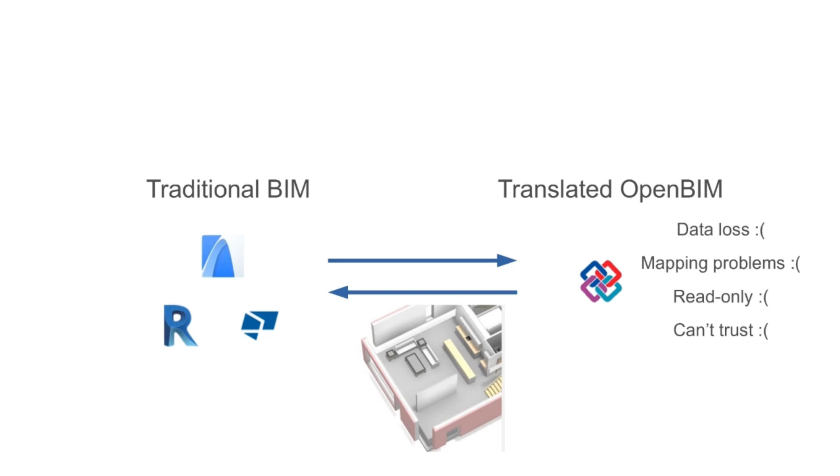So today, I want to go further and talk about native IFC. So instead of translating into IFC from traditional BIM, we can now directly author IFCs natively without any imports, exports, no data loss, and no model linking. So translated IFCs have artificial limitations imposed by proprietary systems. So I'd like to show you some examples of what you can do with native IFC.

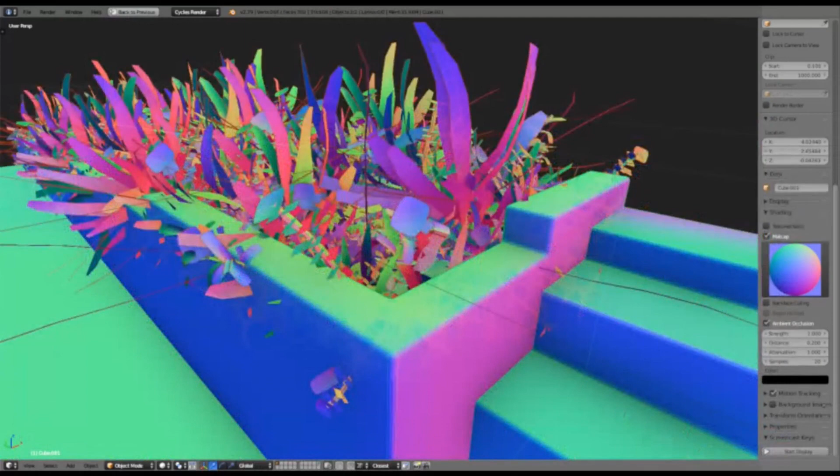Here's an image of my living room back in 2019, and this image is quite special because it's not a photograph. It's actually a render of an IFC model, and every object you see is classified into IFC object types. It has enough metadata to be scheduled with detail down to every individual blade of grass. And this is considered over-modeling with traditional BIM tools, but it's actually quite average if you use CG software instead to create your BIM models.

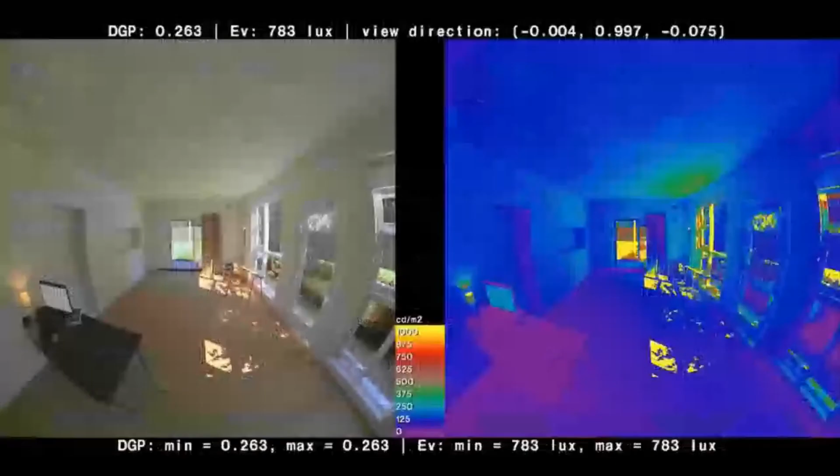This render is also special because it's not an artistic render. It's a photometrically correct, validated light simulation using material data stored in the IFC itself. So there's no test renders, no lighting adjustments, no color pickers used. It's just pure, rich IFC data with numerical physical measurements from product samples. This is rendered using the free software Radiance, which is the gold standard for lighting simulation. So the image shown on one side is the simulation adjusted for the CIE average human eye, and the other is the photograph. So with native IFC, your BIM model can store the data required for validated render outputs, just like this.

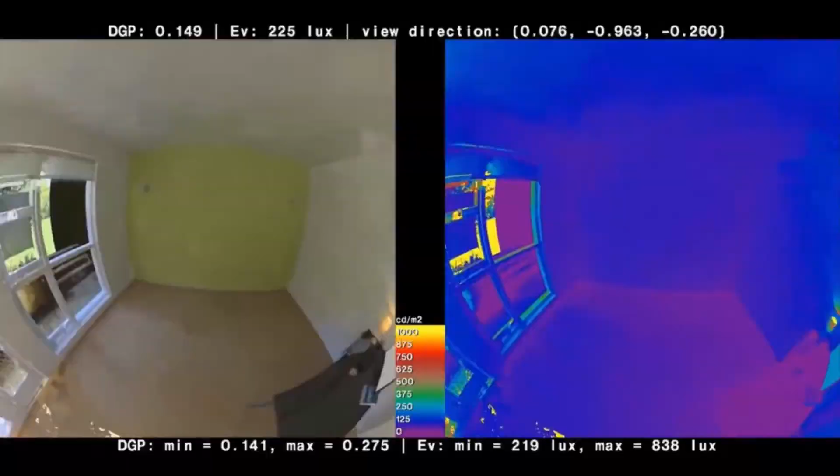Here's some derived work by somebody online who then took this simulation and extended it. He does thousands of simulations to cover every frame taken from a head-tracked VR environment and calculates the daylight glare probability and vertical illuminance for lighting engineers. So here's a luminance simulation with the false color values on the right.

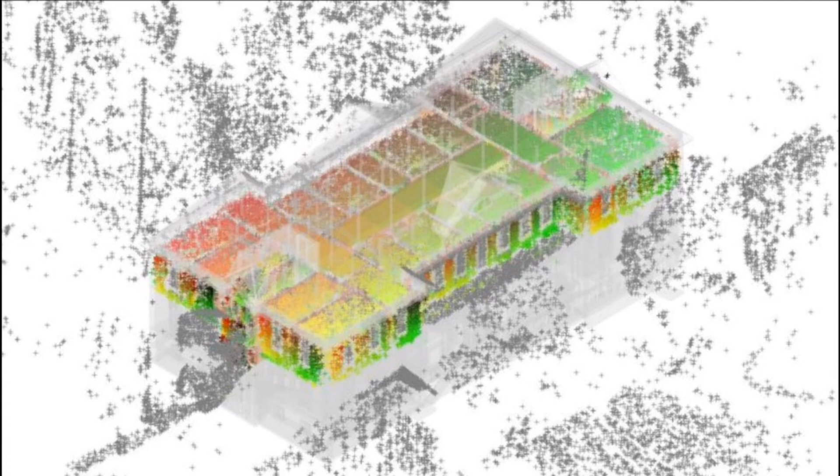IFC also supports point clouds. Here we're taking measurements off a construction site. So semantically, it's not just a bunch of points. These points are actually assigned to BIM objects. So if you're looking at as-built verification, heritage, or model archival, the IFC data and the point cloud scans can integrate.

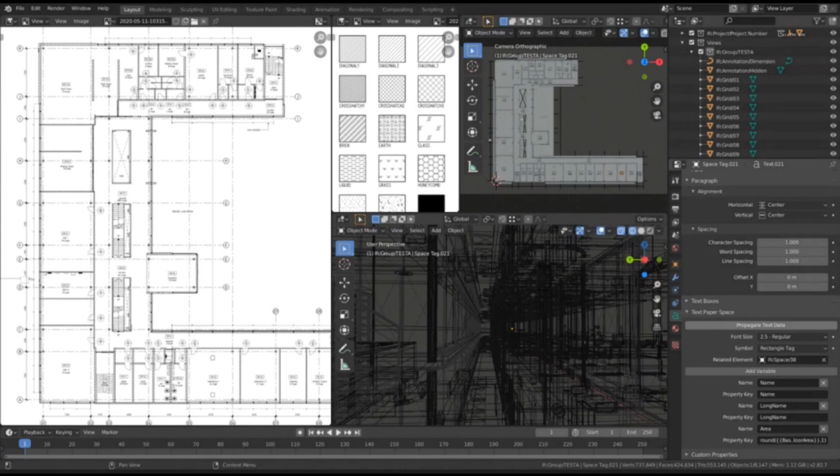You can also generate drawings from IFC. Here's a Revit sample model taken out into IFC, then fully annotated and documented using native IFC. So there's no Revit or AutoCAD, but just pure native IFC for all the grids, dimensions, labels, and so on. Other software in our industry create 2D drawings using proprietary formats such as DWG. Other derived formats like DXF, DWG, and PDF also miss out on all of the BIM data. In contrast, what you're looking at here is the open SVG format, which means that anybody can open it on a standard web browser on your tablet or your phone with no special software restrictions like DWG has.

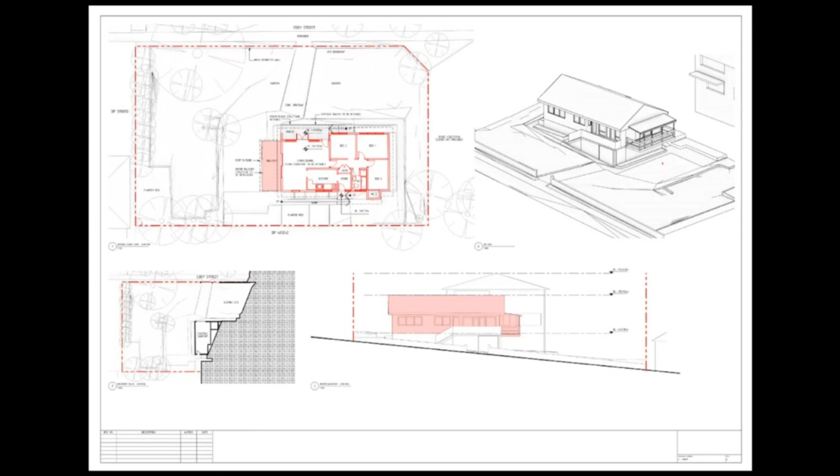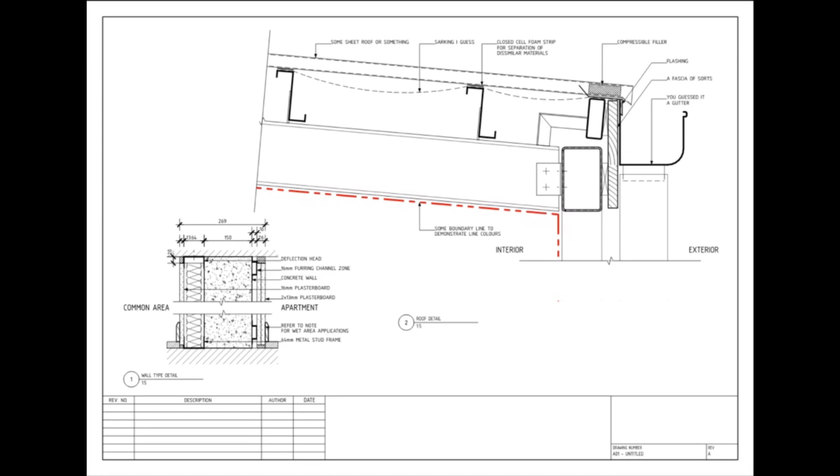SVG also supports semantic metadata, so we can store IFC data in the SVG. So if I have a 2D rectangle on the plan, it knows it comes from a 3D object with material properties and tags. So just by generating a single plan, a viewer can interactively display different properties with different hatches, symbols, or labels on the fly. There's no need to spend hours shuffling around tags on a sheet because your viewer can dynamically generate them. And being native IFC, this means that our drawings now become programmatically queryable. In the same way that you can write scripts to query a model, you can now write scripts to query 2D drawings even after they've been published.

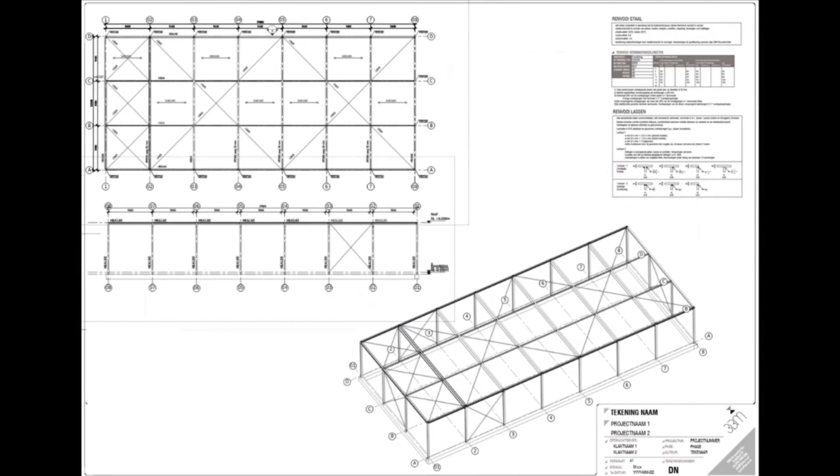So imagine on site, on a tablet, we can click through markers and labels on fully interactive drawings, which can go back and forth between 3D and 2D and auto-generated schedules and specifications, attached BIM documents, and using completely free viewers that work in a regular browser on any device. This could be the future of drawings and diagrams if we switched away from proprietary DWGs and moved towards open data standards.

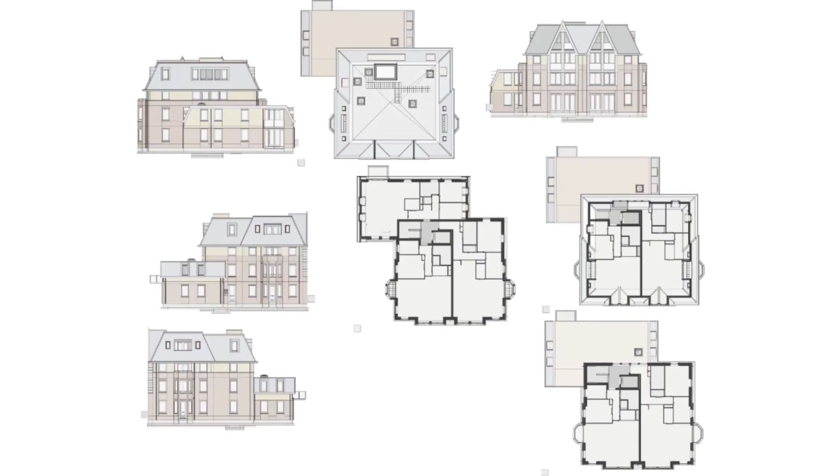Native IFC also supports structural analysis. It supports all the information you need to create analytical models with boundary conditions, load cases and combinations, and structural members. It can be linked to any structural engine you wish. And once the simulation is performed, the results and the reaction forces can then be stored back in the IFC.

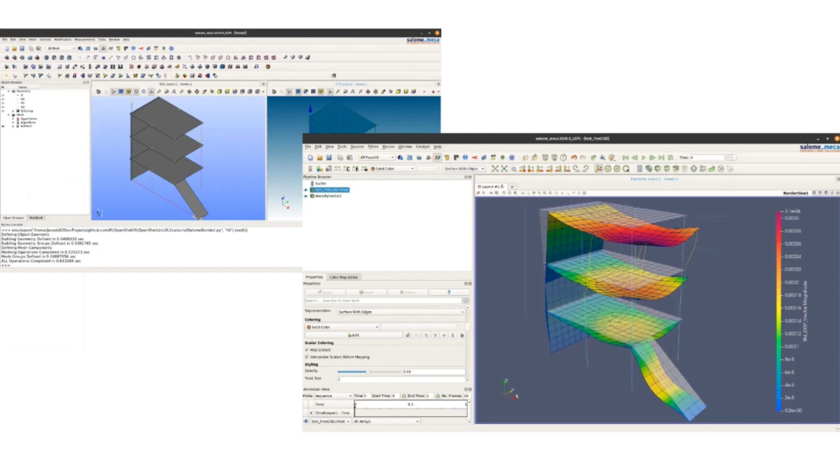So in these images, the structural analysis was performed using an open source software known as Code_Aster, but there are other tools that can be used too. The AdaPy software lets you use high-level code to describe structural IFC components, and these components can be visualized and analyzed both in Code_Aster and CalculiX, another open-source structural analysis package.

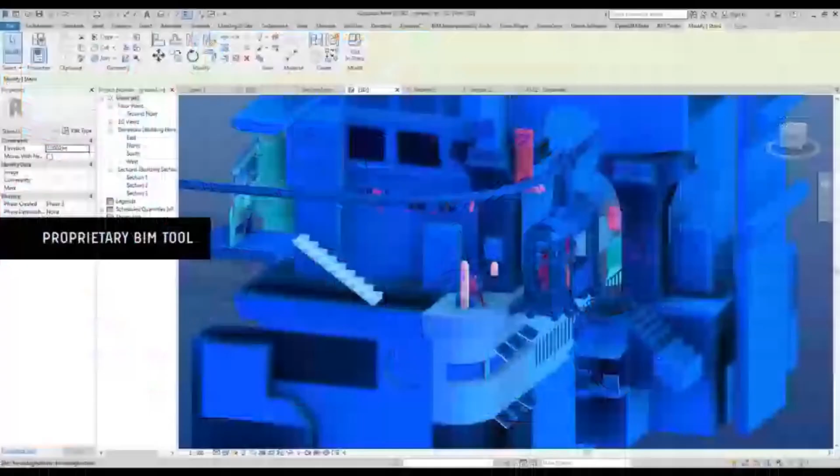Here's an example custom workflow where the user sketches and traces walls which are then converted into IFC walls. So here's another example where a scene is sketched in 3D and you can view it in a VR environment. And even though these are just rough sketches, it's still IFC, so it can be annotated and scheduled. But it still gives you the freedom to think in non-manifold geometry. So here you can see the same scene brought into Revit through IFC.

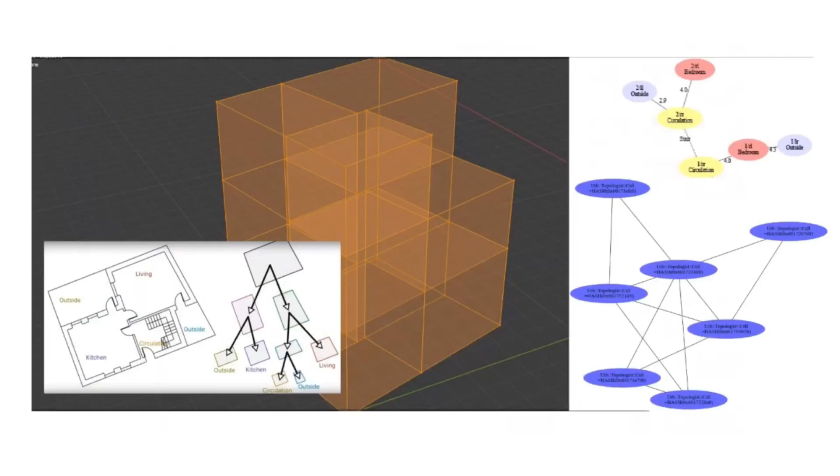And in this example, the building is generated. So the user can draw boxes of these non-manifold spaces, and with some topological analysis to determine the space connectivity, it can generate whole buildings and cities. And so the resultant spaces know their spatial function, and all the walls, doors, and windows are natively stored in the IFC. This same approach goes through an evolutionary solver to start scoring the spaces with respect to the values in the architect book A Pattern Language.

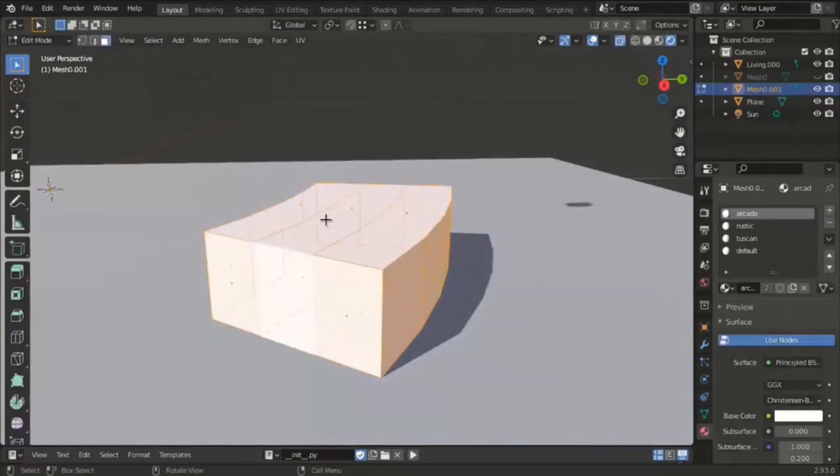And the software we're showing here is actually a combination of 3 free software: Topologic, Homemaker, and the BlenderBIM add-on. So Topologic provides the topological analysis of the geometry, where you can determine whether spaces are connected using code. Homemaker then uses Topologic to generate designs in native IFC, and the BlenderBIM add-on then helps visualize and use Homemaker to modify these IFCs.

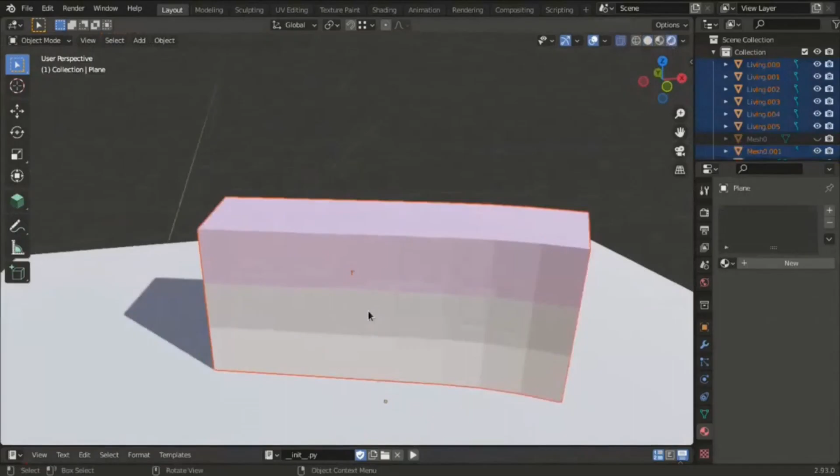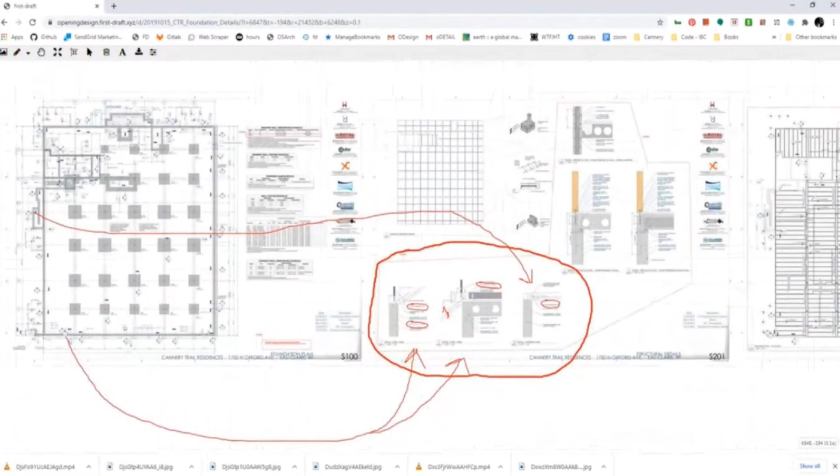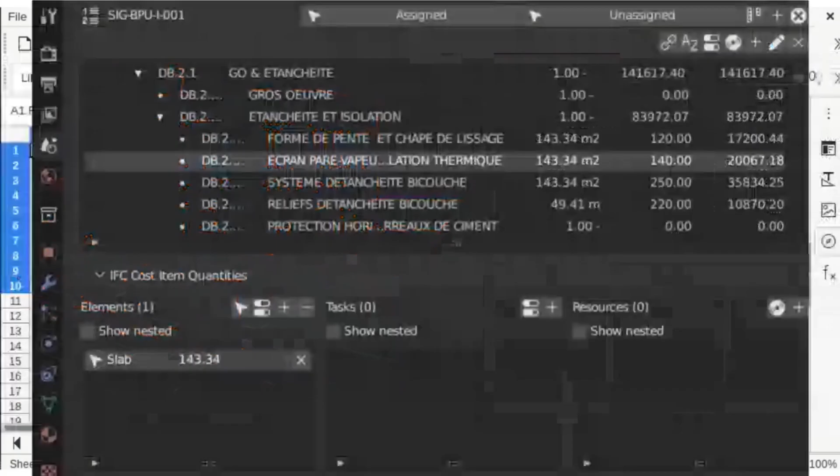Native IFC also supports costing completely integrated into the model with formulas and derived quantities. So you don't need to export models or link models or map the models. You can just directly create your cost schedules within the model alongside your design team. And even more complex operations like automatic formwork calculations can be performed and recorded directly in your cost schedules.

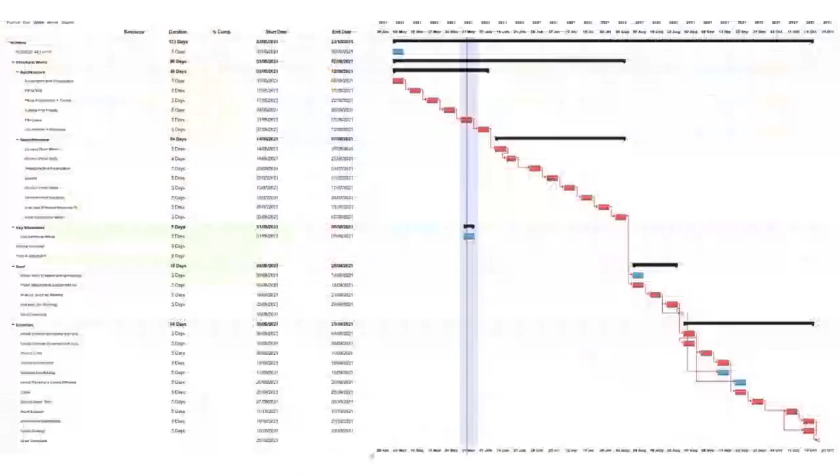And the scheduling can also be done with native IFC in a similarly fully integrated manner with no exports or linking. You can create calendars, work schedules, task dependencies, and calculate critical paths, float, early and late dates, recorded versus actual. And naturally, we can also visualize the progress or generate animations. And all these animations were generated directly from the IFC. So if you update the model or the schedule, the animations automatically update alongside it.

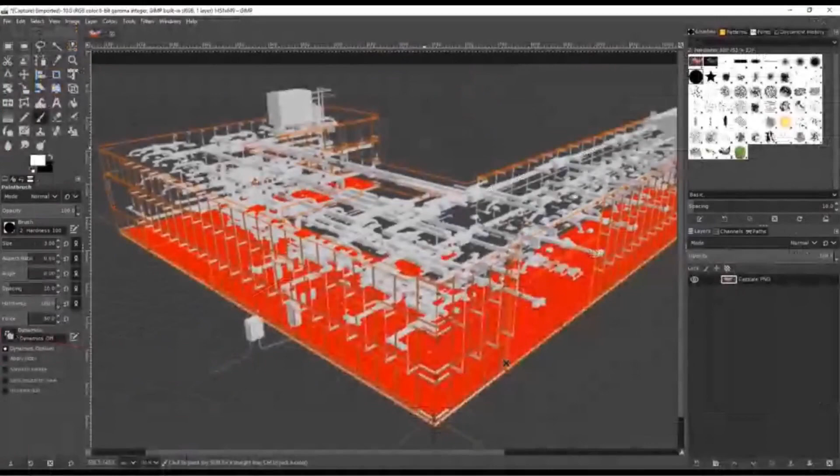There's also automated model checking, project asset libraries, classification system integration, design constraints. But I don't have any pretty pictures for those, so we'll skip over this stuff. So how does native IFC actually achieve all of this?

IFC describes a series of concepts that have meaning in our industry. And each one of these concepts is known as a class, and that's how the Industry Foundation Classes gets its name. So for those who know programming, this is very much like classes in programming. And for those who don't, don't worry about it. Just think of a class as a concept. And each class has a definition provided as part of an international standard. And these classes have attributes to give information about them, like name or description.

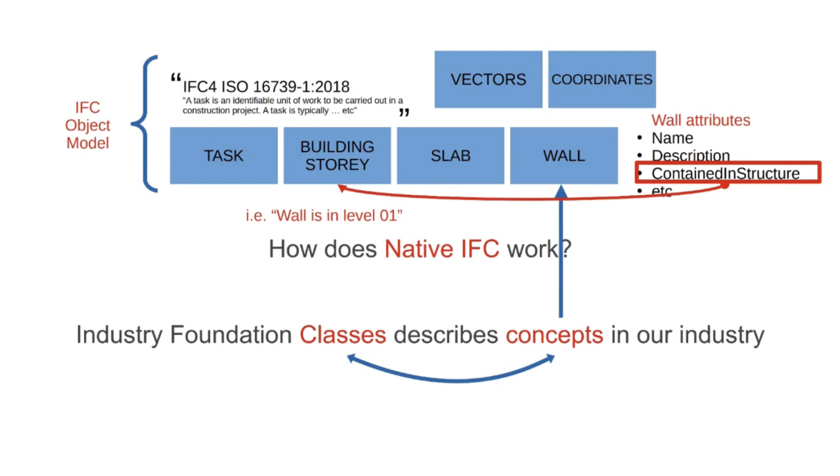And some of these attributes refer to other classes, so classes can be connected using relationships. And some of these classes are semantically meaningful to humans, and some are a bit more like raw data that makes sense only when combined with a semantic class. And when you put all this together, this is known as the IFC object model, and you can query and generate output from it. So any software can create and describe BIM concepts using IFC classes with any programming language. And if you want to transfer or store some of these classes, you can serialize it into one of these formats.

And the one most of us are familiar with is the .ifc file, and this is a plain text STEP-based serialization, but you can also use XML, JSON, and binary. Or you might not even use a file. You might use a relational database or a graph database, or just something purely in memory and access it through an API and exchange snippets of JSON or XML.

In total, there are nearly 1,000 IFC classes, and we won't have time to go through them today, but I can provide a high-level overview and pick out some classes as an example of what's possible. And because there's so many classes, the definition of these classes are categorized into a hierarchical tree, and this groups together similar classes. And when you group them together, this means that they inherit all the attributes and the relationships of their parent classes. So you can think of this tree as a dictionary of IFC classes, and you can see this full list on the buildingSMART online documentation.

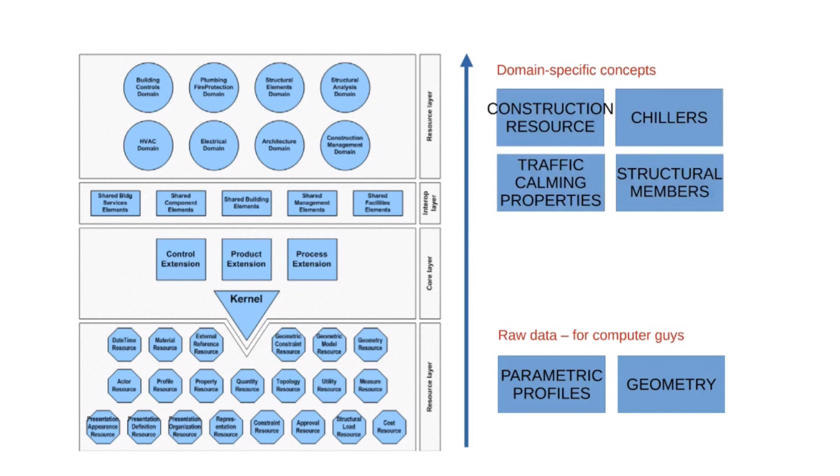And these groups then have more subcategories within them. And these categories are designed for different audiences to understand. At the bottom, we have the fundamental building blocks, like the classes that represent geometry. And at the top, we have high-level categories, which are most relevant to specific disciplines, like HVAC classes, or electrical classes, or structural classes. And in between, we have classes that are shared across multiple disciplines.

And for some people, they prefer to browse the dictionary of classes via an alphabetical list. Some like to look at it as a hierarchical list, and some like to look at it using these categories. And there's no right or wrong. They're all just different ways to navigate through IFC concepts and will appeal to different people. And although this dictionary is a great reference of all the classes and concepts in our industry, a dictionary only tells you the meaning of words, not how to construct sentences.

If you want to describe scenarios in our built environment, we need to combine the classes together using a mutually agreed approach. So to understand how to combine classes meaningfully, there are a series of fundamental concepts described in the buildingSMART documentation. And here's the chapter to read more, but today I'll focus on 3 simple concepts to describe and give you a taste of what's possible.

The first concept is the IfcProject class. When you're describing a BIM project, you must define your project using the IfcProject class. Once you've defined it, other classes may be related to your project directly or indirectly. So this means that the project is the entry point for all software to start looking for data. This is a bit like reading a book. You always need to have a first page to begin reading.

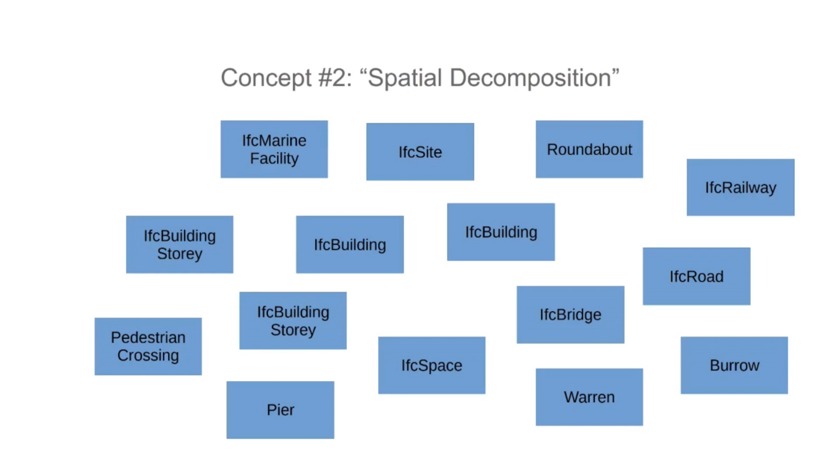And I can repeat this pattern again and again and again to create a tree of spaces and stories, wings of buildings, multiple buildings and sites and roads and traffic lanes and so on. Here's another simple, fundamental concept to describe material associations. So let's say we want to say that a slab is made out of concrete.

We can use an IFC slab and an IFC material class, and we connect them using an IFC rel associates material class. So just like the IFC rel aggregates class we used in the spatial decomposition concept, you'll notice that both classes contain the word rel, and they're all used for relating things together. So here the IFC rel associates material class has 2 attributes which we can use to connect our object with our material.

There are a lot more concepts we can't cover in detail, but we'll skim over a few more just to get an idea of what's possible. So here's a simple concept which describes how a work schedule can contain tasks. And of course, this is used in construction scheduling, but it's also used in facility management. In construction scheduling, a work schedule is a collection of tasks that must be completed over a specific timeline in order to reach the final deliverable of the project, such as constructing and commissioning a building.

We can extend this concept with this one, where tasks can be linked to objects in the BIM model. And in this concept, our task is set as a construction task, which means that the task results in the wall being constructed. Tasks can also have sequential relationships. So in this scenario, a predecessor task, which is setting up the formwork, has a finish to start relationship to a successor task, and it has a lag time of 1 elapsed day between them.

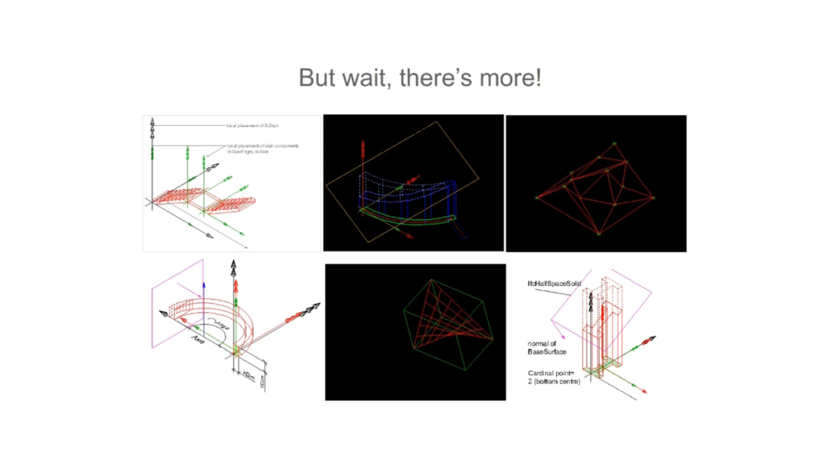And these concepts are quite straightforward, but some concepts are very difficult to understand. I'll show you an extreme example. So there are concepts which describe details about implicit and parametric geometry, such as for rail alignment curves. And this requires a detailed understanding of computational geometry to appreciate.

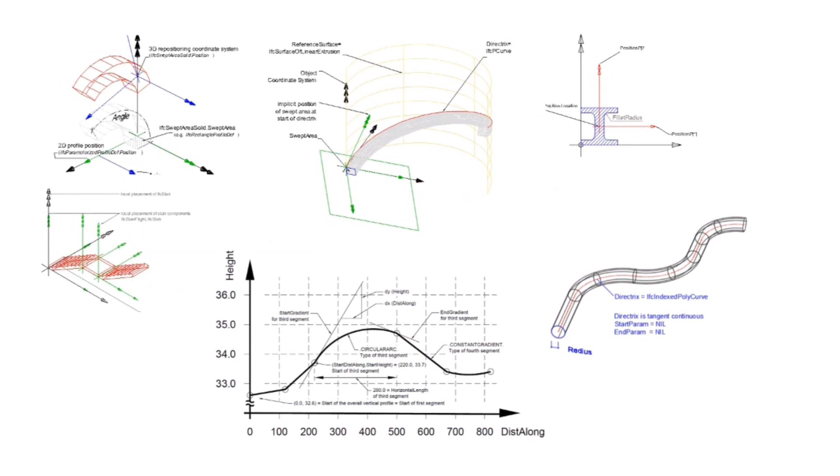There are over 100 concepts described in IFC, and I've only explained 3 basic ones and skimmed through a few more, but there are so many I won't have time to go through today. But I hope you can see that IFC can be incredibly rich in data, and it applies across many disciplines and offers more than what we're currently doing to digitally describe our built environment. And it's an incredible industry effort to standardize and localize the immense amount of interdependent data that we work with.

And right now, our industry is like the early days of the internet, where websites mostly work with certain browsers but not others, and the shared protocols and languages of the internet were still being formed. So I hope you can see how closed data, vendor-specific APIs, and lossy data translations through imports and exports is just not the future.

The future is when our foundations all natively speak the same digital language, formed through mutual industry agreement. And it took a long time for the internet to get to where it is today, and that's from the most digitally savvy industry, the IT sector. Our industry is divided and diverse, and it's only slowly catching up to the norm in other digital systems. So we really need to work together.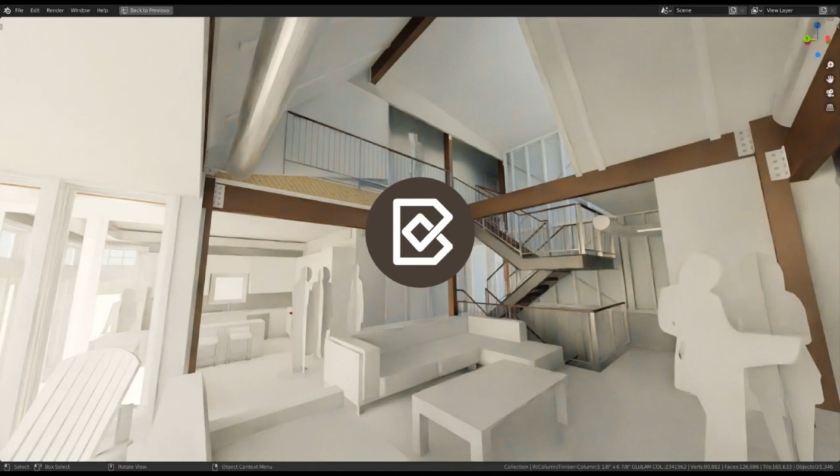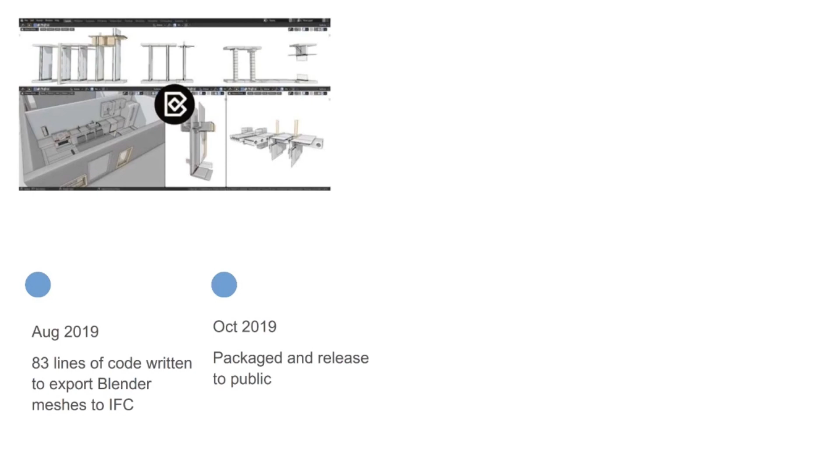And we had two choices. We could either rebuild the model with traditional BIM tools, or implement IFC into Blender. And we took a leap of faith, and we wrote 83 lines of code that exported Blender geometry into IFC. And this was pretty exciting for us. And those 83 lines of code grew into a digital engineer's Swiss Army knife to work with IFC. And a month and a half later, we packaged it for the public, and someone picked it up. And they used it to visualize compactor machine data to build a highway.

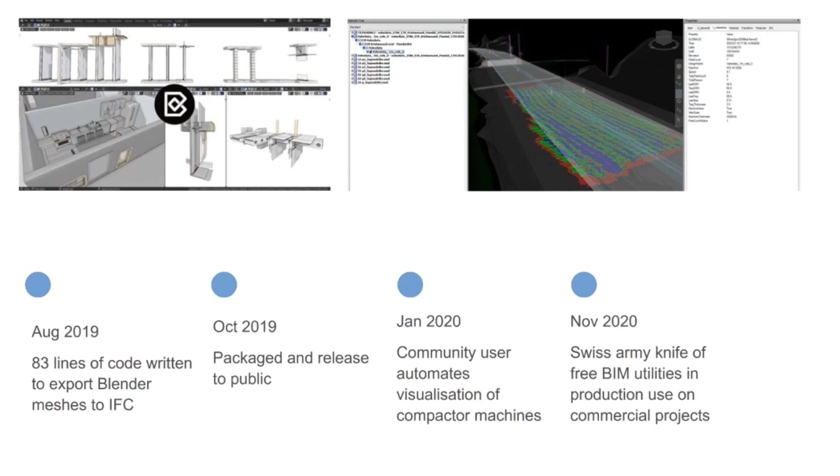Now, obviously, visualizing compactor machine data isn't top of the list of features when you're developing a BIM app from scratch. But it goes to show it's not about vendors delivering a product. It's about users collectively building an ecosystem of utilities that you can repurpose to build the tool that you need. And since then, IFC OpenShell and the Blender BIM add-on has won the buildingSMART Technology Award. We've received an Epic Games Mega Grant, a Cesium Ecosystem Grant, and annually participated in the Google Summer of Code.

It's also now being used in various workflows, from end-to-end delivery of small architectural projects to more specialized tasks on huge projects like hospitals, train stations, and perhaps the biggest rollout yet being the Hinkley Point C nuclear power plant in the UK. There's also a number of universities teaching this and hundreds of results in academic papers.

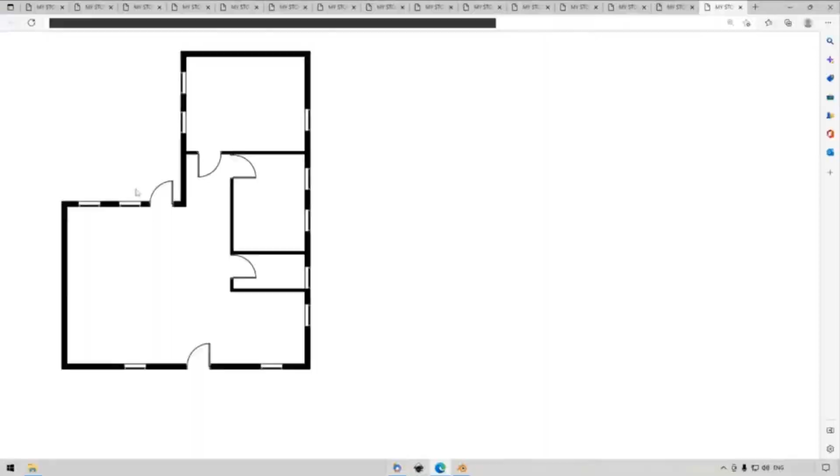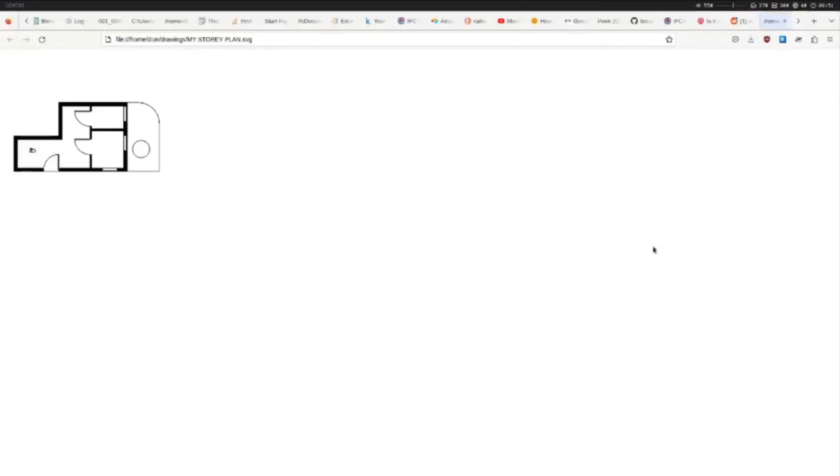So here's an example of a small building being modeled natively in IFC with the Blender BIM add-on. So we're directly creating IFC walls, IFC slabs, IFC doors, IFC spaces, and so on. And we can generate drawings, we can cut floor plans, sections. We use IFC annotations for dimensions, IFC documents for drawings and schedules. And what you'll notice is that it's really not that different from the tools that you already use. We're creating elements from a library of construction types, parametrically layered materials, and standardized profiles.

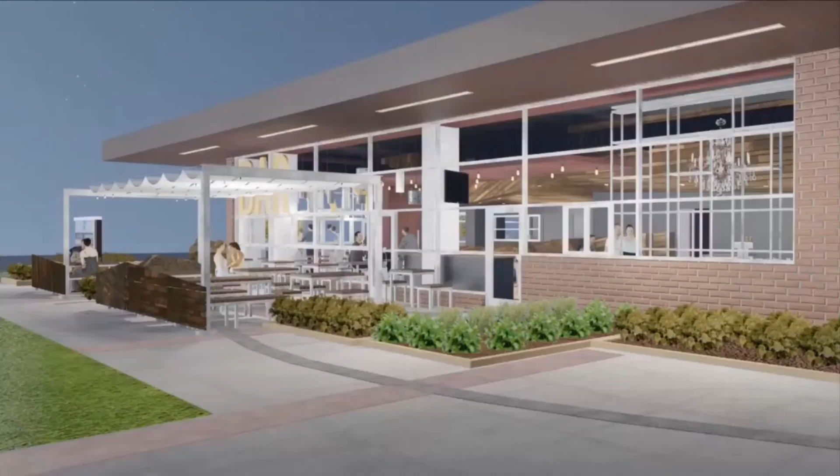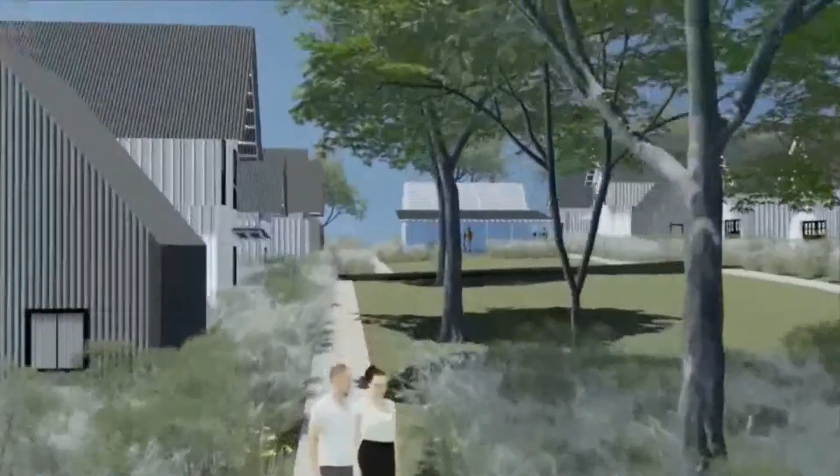Here's an example of a small architectural project by Opening Design, delivered end-to-end with native IFC using the Blender BIM add-on. This involves modeling, drawing and documentation, and visualization. So using IFC as a native format doesn't prevent integrations or extensions for highly parametric or bespoke modeling. IFC contains basic parametric doors, windows, layered and profiled elements, pipes and ducts, but we can also support more complex scenarios like parametric assets, stairs, roofs, and visual scripting.

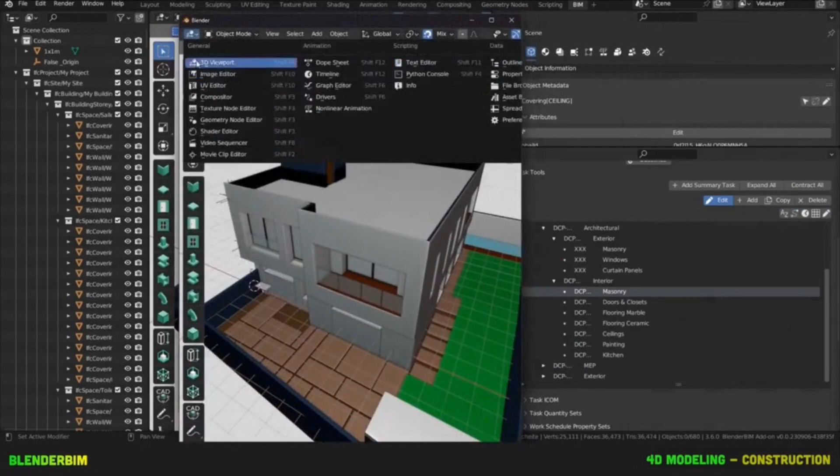So here's something a little different. In this tutorial by Sigma Dimensions, we can see creating an availability calendar and construction work schedule directly in native IFC. You can see different task relationships being created, like finish to start, start to start, and so on, lag times being created, and naturally the 3D modeled element can be related to tasks as well.

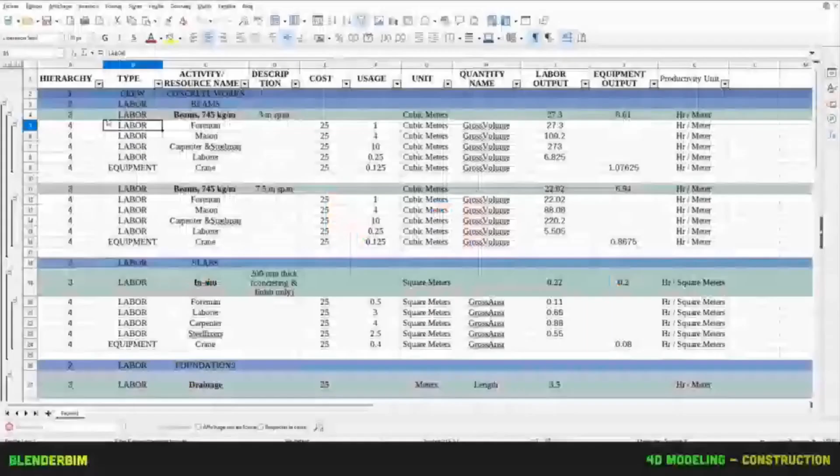And IFC also supports construction resources. So he's storing the cost rates, the productivity rates for labor and equipment, and these can be parametrically linked to the schedules, so the task durations can be calculated from the labor productivity. And this would also update any cost schedules that are linked to, and you can start balancing cost, time, and resources. And of course, you can visualize this with a variety of colors, animations, and Gantt chart styles.

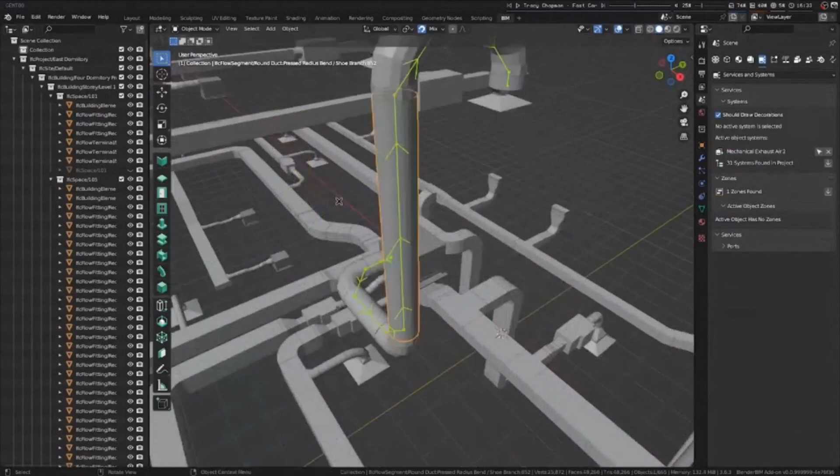And in this demonstration, we're looking at distribution system connectivity. So IFC understands different system types and subsystems. It knows when ports of different equipment can be connected to one another and the direction of the distribution flow. You can also link it to sensors and time series data for live sensor data with external libraries or open source schemas like Brick Schema.

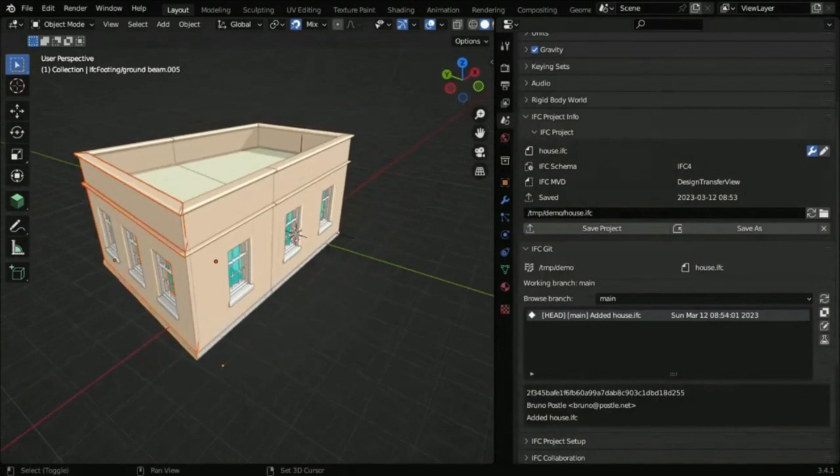And in here we can see this incredible technical demonstration by Bruno Postle about the IFC Git integration. And here we can see multiple people around the world collaborating on the same IFC model for the first time since being introduced to this feature. Modifications can be visualized, and simultaneous changes to different and same parts of the model can be reconciled into a valid IFC graph.

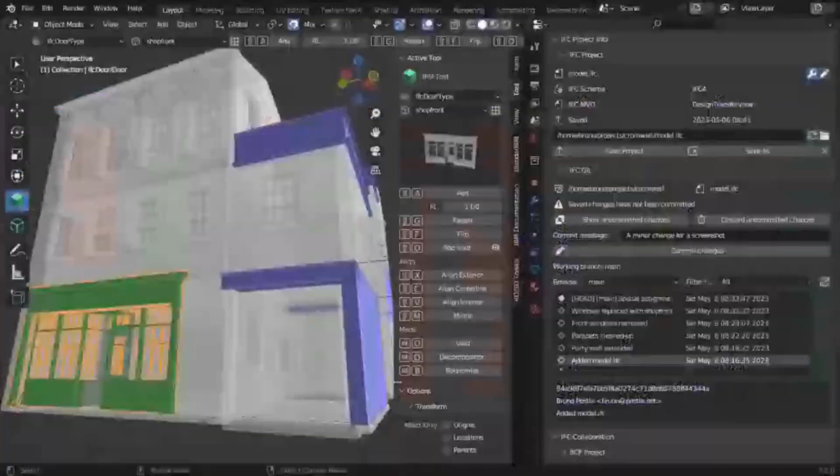I'm only showing a tiny portion of what's available with native IFC. Here's a taste of some of the other utilities in the IFC OpenShell ecosystem. So whether you're generating asset register spreadsheets using COBie, or doing visual scripting with Sverchok, or clash detection, there's a lot more to cover. And we also haven't gone into detail about complementary schemas like model auditing using IFC Tester, or model coordination and review with BCF, or standardized property set templates and classifications with the BSDD.

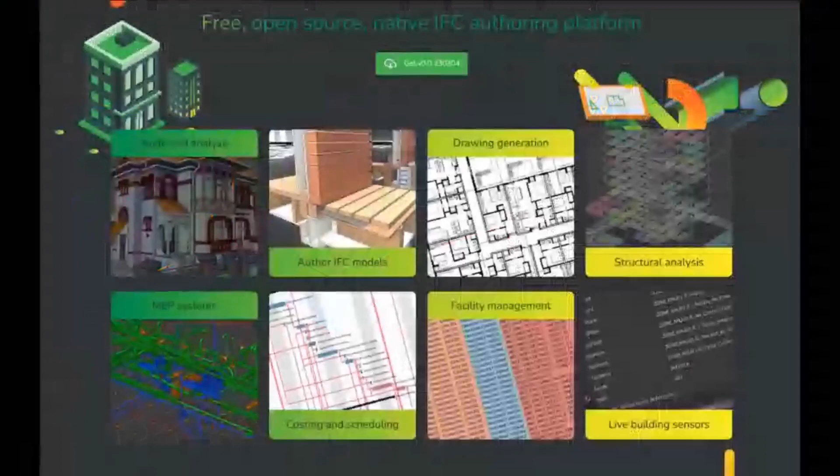For the programmers in the audience, IFC OpenShell is available in C++ or in Python, and there's also a technical preview of a WASM implementation to run on a web browser. It's available on command line and graphical interface, so you can build these headless server workflows for your BIM models.

So here's a simple example of how to create a native IFC from scratch. We'll create a blank file, create a project class, we'll define some units, and we'll add a new building. We'll spatially insert our building inside the project. We'll create a slab, a roof, and the 4 walls, and we'll put our building elements inside the building, and that's it. We have a minimal BIM model in 15 lines of code.

Our documentation covers this and a lot more in more detail. And the reason we could build a BIM model so quickly is because IFC OpenShell offers a high-level API to manipulate IFC. And this API is unique in the industry. It's the only tool that comprehensively offers native IFC manipulation via code across 40 different modules that tackle everything from geometry, 4D, 5D, structural analysis, and more.

And all of the API calls are high-level, so the details like purging the subgraphs, handling IFC version differences, ownership tracking, date-time conversions, and so on, they're all resolved for you. The IFC OpenShell system is also unique in that it supports transactions, so you can undo and redo operations. This is used by the FreeCAD project, xeokit, BIM Server, and many other applications in the industry.

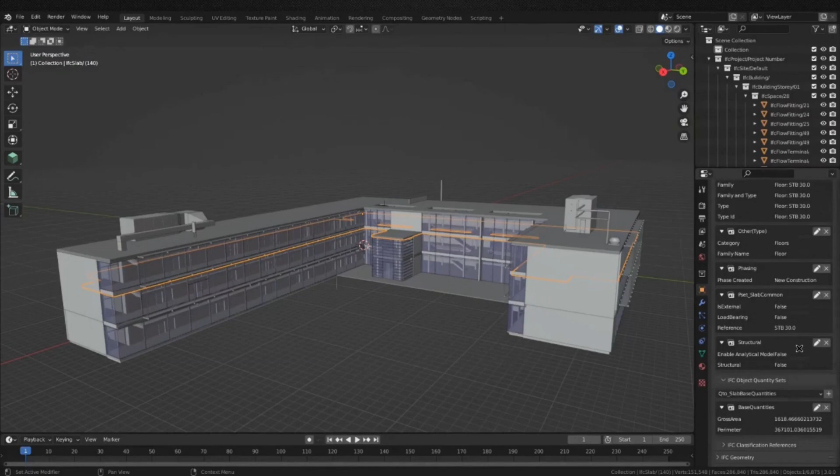So let's select the data and let's add some standardized metadata about a lease agreement. We can also use the IFC CSV tool to export a spreadsheet schedule of all our walls. Let's edit the spreadsheet and we can re-import the changes back into the IFC. And you can see we're very quickly auditing and editing the IFC data in bulk.

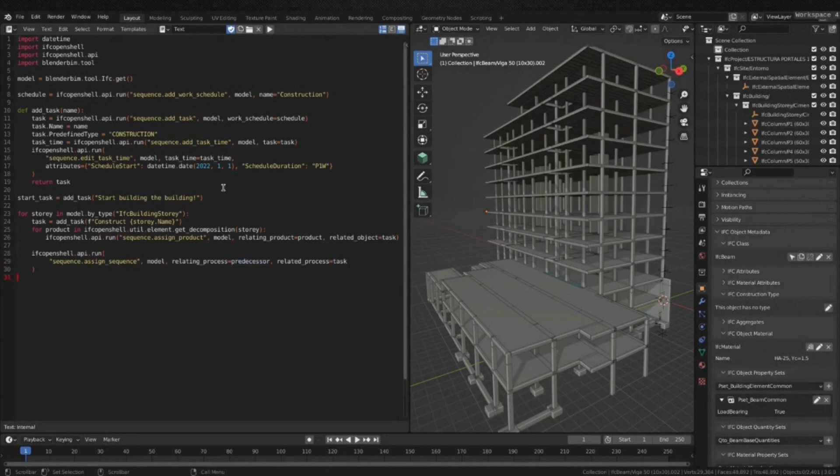And what I'm showing you is that you can mix and match tools to suit your workflow. So here's another example. We're going to do the exact same thing, but with code to bulk edit data using spreadsheets. And in this example, we can use code again to automate the generation of a construction sequence. And you can visualize it in Gantt form or animation form. And here's a simple overshadowing study done live on the fly.

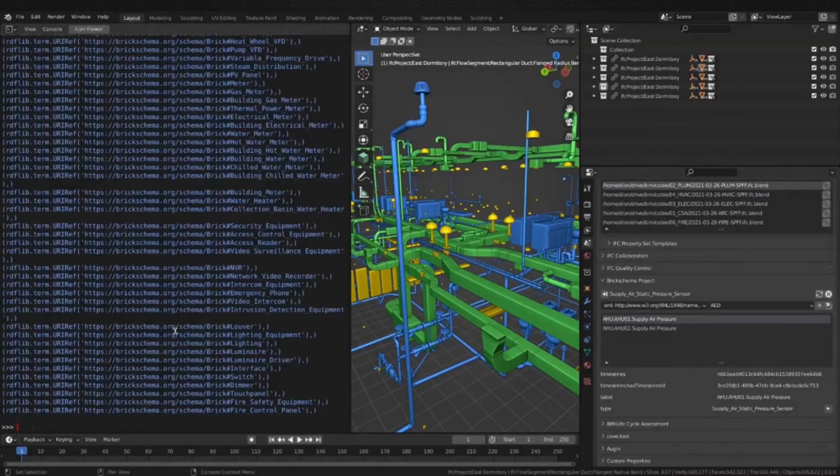Even if you don't know programming, I'd like to walk you through a very simple example of using code to interact with IFC. Blender comes with Python pre-installed, so you don't need to install it separately. It comes with an interactive Python interpreter, and you can run full Python scripts. Of course, if you want, you can install everything separately and run it on its own. But using Blender and the BlenderBIM add-on can get you up and running in about 5 minutes. So let's activate the built-in Python interpreter in Blender and run some code.

The module in Python that provides all the functions to interact with IFC is known as IFC OpenShell. To use it, we'll type import IFC OpenShell, press enter, and now when you type IFC OpenShell followed by a period and press tab, it will autocomplete showing you all of the available functions. The function we want to open an IFC file is called open, and you can see it returns an IFC object, which you can store in a variable. If you tab into that variable, you can see all the functions we can do on the IFC file.

Let's say this is the IFC that we just opened. Every IFC class is on a new line, and there's an ID number at the beginning. The project class ID is 11. So to retrieve data about the IFC project, just use the byId function of IFC OpenShell, and this will give you back a project object.

If you tab into the project object, you'll find all of its attributes. If you type the name of an attribute and press enter, you can view the attribute. So here's the full script so far just to get the project name, and it's 4 lines of code.

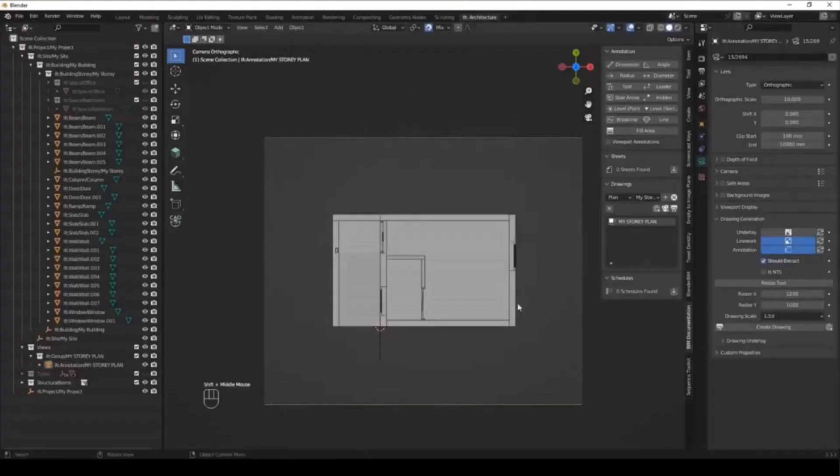I'd like to stress that everything I've demonstrated so far is only alpha software. There are many incomplete features and bugs, and this is a work in progress representing the leading developments in the field of OpenBIM. So it's not yet a drop-in replacement for the more entrenched traditional BIM tools, but it's slowly growing. That said, I hope you're excited by what you see and can see its potential.

There are over 150 developers who have volunteered to contribute to the software, and it's starting to reach a point where you can deliver a small architectural project end-to-end in native IFC. We also know that it's playing various roles on larger projects, not for end-to-end delivery, but in auditing, fixing, and certain bespoke systems integration that these larger AEC firms tend to be capable of.

The IFC OpenShell and BlenderBIM add-on software that's been showcased throughout this presentation is completely free and open sourced. That's important because today's talk isn't just about cool technologies — it's also about a cultural shift that our industry is going through.

This cultural shift is known as a free software culture. The term free software has got nothing to do with the cost of software, the money involved, but it's specifically about four types of freedoms for the users of software. And this means our own freedom as industry professionals.

The first freedom is that we must be able to use software for any purpose. Secondly, you need to be able to study and modify the workings of the software. So if the software doesn't do what you want it to, you can fix it, or if you want to understand why things are the way that they are, you can investigate.

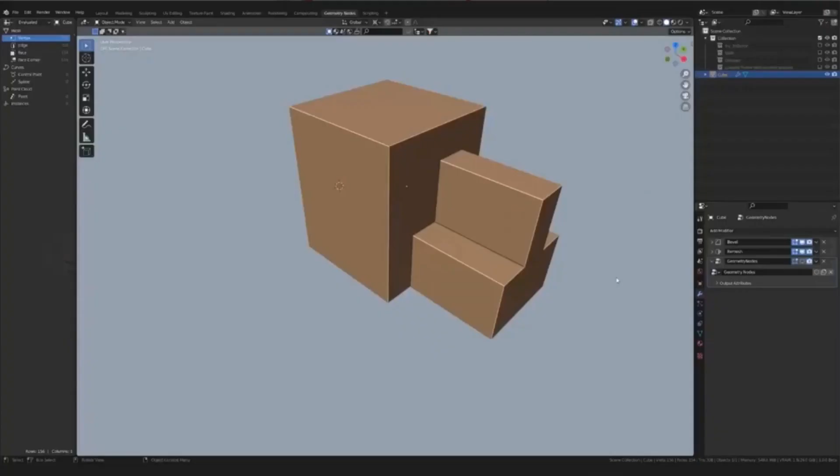This pattern happened again with open source software like Blender, which provides access to mesh modeling, computational design, and visualization to everybody. And FreeCAD is doing the same for parametric solid modeling, industrial design, and computer-aided manufacturing.

A similar shift is happening right now with BIM. Open source software libraries like IFCOpenShell, xBIM, and IFC.js now allow anybody to build their own BIM software that's based on the cross-discipline research and data structures developed over 25 years of industry experience. These open source libraries are already used in academia for the latest in BIM research and teaching, and it offers advanced capabilities far beyond the proprietary solutions.

The open source architecture community also maintains a directory of over 100 free software currently being developed that are related to our industry. They also maintain a directory of libraries to build your own software. And I've only had the opportunity to demonstrate just one of these today, but hopefully I've shown that there are many incredible communities out there trying to do better.

And one of these communities is known as the Open Source Architecture Community, or OSArch. And this covers all disciplines, not just architecture. And it's a fantastic entry point to discover just what's out there with resources like forums, chat rooms, Meetup, Wiki, and more. It's a community of industry professionals who understand that working with our built environment is a complex task that no single person, company, discipline, or country has the answers to. And by sharing together, we can make a better world.

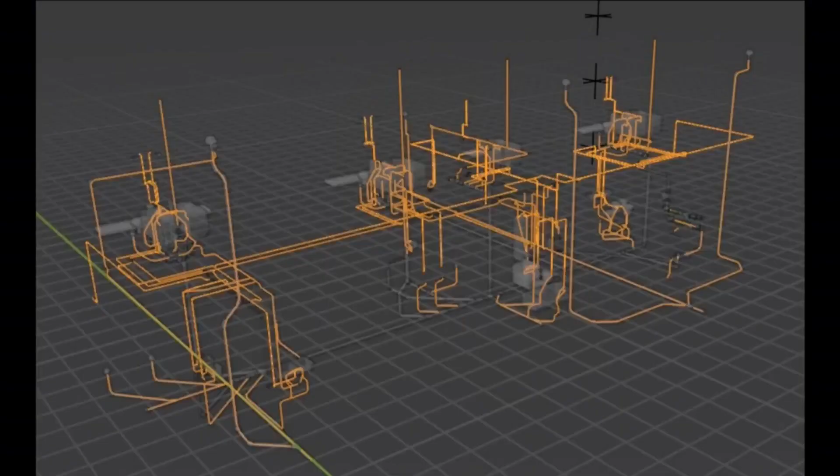So as the explosion of new technologies continues, our industry is shifting away from a vendor-centric approach to a native open data approach. And this comes with an ecosystem of interoperable, free open source software. Imagine how different our industry would be if we invested in this accessible open source system 10 years ago. But now is the chance for all of us, large or small, whether or not you can write code or implement policies or teach or do research, everyone can make a difference. So by working together, we can build a new digital built environment that we have full control over. So let's change the industry together.